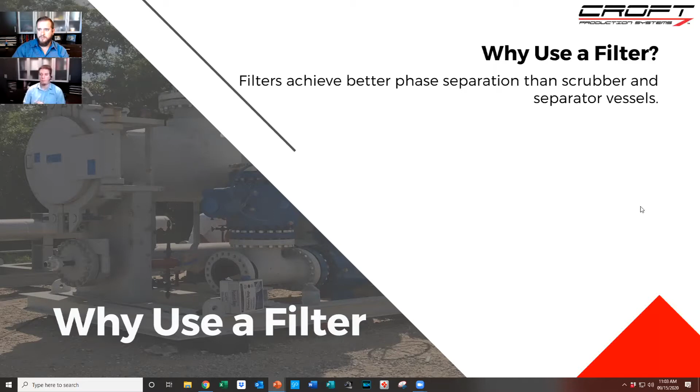And then for liquids, filters are super important to making sure that things stay maintenance and trouble free. So it's pretty well ridding yourself of these contaminants. We broke it up into three major areas: solids, semi-solids, and other contaminants. Can you elaborate on those three categories and why we break it up like that?

Yeah, so the particulates and liquids are what you want to get rid of first, and filters are really good ways of getting rid of the smaller particulates that may float through the gas and carry through. They may not stick or fall in the liquid, and they also get rid of some of the aerosols and mists that are going through there. But there are different kinds of contaminants that you may see. You have your solids, which are like your sand or your dry rust particles.

You also have your semi-solids, which are more like solids that are stuck in a liquid that make it a lot more viscous, a lot thicker. That's where you get sludges or slimes that may stick, like paraffins. Paraffin is a wax, and it's tricky because it can be a solid or a liquid depending on the temperatures you're in, so it can end up in different forms in different areas.

And then other contaminants can be like your foams, which are kind of like your weird phase items, and some of the weirder chemicals that may be out there that you want to remove before it gets into your processing equipment.

And the reason we want to take it out first is we don't want it to get into the downstream processing equipment where it'll get picked up and cause damage in that more expensive equipment. So I know you design glycol systems, amine plants.

So after this, you really want to kind of focus on the common issues just to hit home the solids, semi-solids, other contaminants.

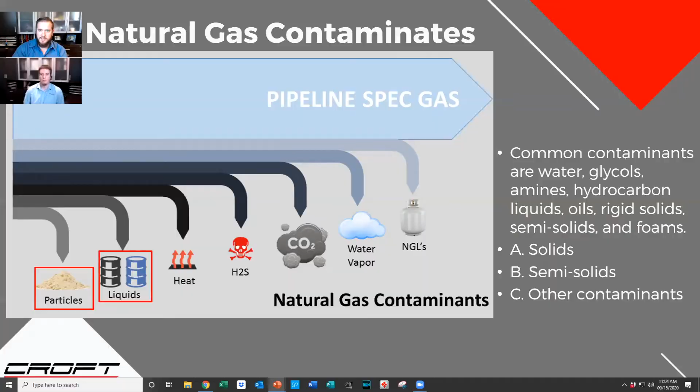So the first one you have for a common issue was hydrocarbons. Explain to us why this is a common issue. Yeah, so hydrocarbons, that's going to be your non-methane type stuff, your heavier hydrocarbons that may be coming through your gas stream and they end up in that processing equipment. Hydrocarbons are probably your most common issue, especially if you have a richer gas coming in through the system.

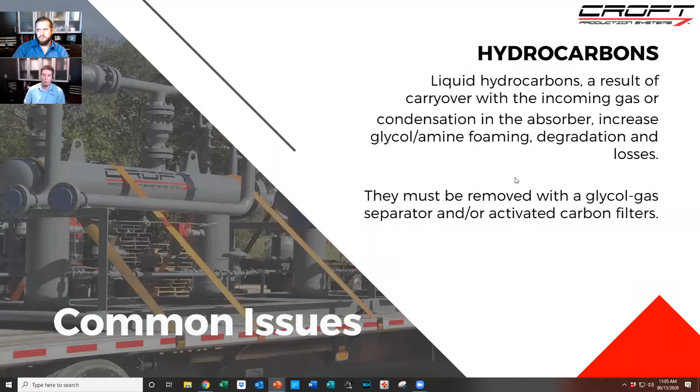Hydrocarbons, if you're not separating them out properly, either you have undersized or improperly sized separation equipment, it may make its way in there. With a glycol unit or an amine plant, you're basically liquid washing that gas stream, so it makes it very easy for it to pull things out of that gas stream, and it'll just take it to the regeneration side. Hydrocarbons, you can have a lot of them, especially if you have liquid carryover, a lot of condensate, that can come into your system. That can very quickly cause a big problem with your system. So making sure you're keeping an eye out for those is probably your biggest issue you're going to run into. So that's hydrocarbons. We got three more common issues.

The second one is sludge. Kind of go into what is a sludge, what makes a sludge, and then how would you remove it? So sludges can form pretty much anywhere in your production stream. If you have low spots with liquids, you may get some weird sludges that form due to production chemicals or particulates. But within a glycol or an amine unit, the sludges may form due to the combination of the heat and the temperatures and the different contaminants that may be ending up in that liquid.

So the sludges are pretty tricky. They can often be sticky. They can change their parameters depending on the temperatures. They may be soluble at a high temperature, so they don't show up in a reboiler, and then they carry through and cool off in a heat exchanger, and all of a sudden they stick to the walls of everything. So sludges are tricky and can form due to various reasons.

They can be a degradation product of the amine or glycol. If you heat it up too much, it may overcook it and then become a problem. But good filtration is really essential to making sure sludge doesn't form and doesn't end up in places where it's not supposed to.

Yeah, kind of what Terry was talking about on the glycol system, it does a lot on the absorber trays. It starts getting into the heated areas, and then you start losing that heat transfer, right? Yeah, it can really affect your heat exchangers if it's collecting in there, and if it's building up in a low spot and all of a sudden slugs into a pump, it can really damage a pump. And pump rebuilds are going to be one of your higher cost items for your standard maintenance on a properly working amine or glycol system.

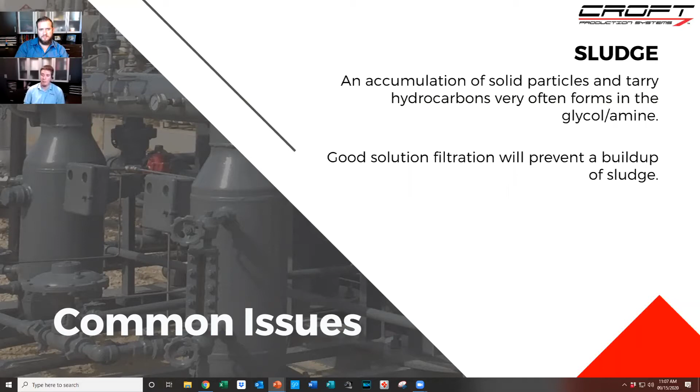Well, your third common issue, I know it's common, but this seems to happen a lot. It seems like you're getting a lot of troubleshooting tickets, mostly for foaming. Yeah, so foaming is usually caused in an amine or glycol system either mechanically or chemically. So mechanical foaming is going to be like particulates that get in there, and just the action of going through a bubble tray or some sort of tray tower, you're going to get that agitation that creates more foaming just from the mechanical side.

That usually breaks away pretty quick. It can be a problem if you have a lot of particulates in there. It can help carry some of those particulates into other areas you don't want them. But the big issue with foaming is the chemical foaming.

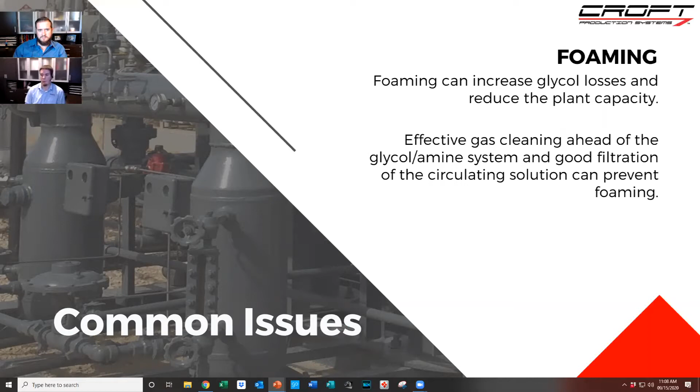So if you get a surfactant or some hydrocarbons into the system, they can create foaming of your glycol or amine, and that can very quickly cause a big upset, either carryover out of your tower or out of your still column. So minimizing foaming is very important. Typically in the more extreme cases, it's a chemical problem, like a surfactant carried through a compressor lube oil, or the actual lube oils themselves can cause problems, or some production chemical getting into the system causing that.

That's it. So from the common issues, we really wanted to focus on proper filter choice. The only way you can utilize that is by dissecting what is actually needed. The first one you broke up into two different designs: gas and liquid. The first one you're looking at is the gas application design. So walk us through - if you had someone coming to you, what would you look for?

The first thing you want to know is what the contaminant is you're trying to remove. Even if you have an existing filter vessel, there are different options for filter types that can go in there, and those can benefit you in different ways depending on what you're trying to remove. So if you have a dry gas application with an iron sulfide issue, like a black powder, there's a filter that works better for that than something that'll coalesce NGLs out of the system, or something for compressor lube oils. Knowing the contaminant you want to remove is number one, because that gives you the type of filter you're looking for.

Then you want to know your maximum flow and minimum operating pressure, because we're looking for superficial velocity through that system, so we know how to correctly size for that application. The temperature gives you some material choice restrictions at higher temperatures. And then the gas composition, to make sure the materials are compatible with what you're doing, and to get the specific gravity of the gas.

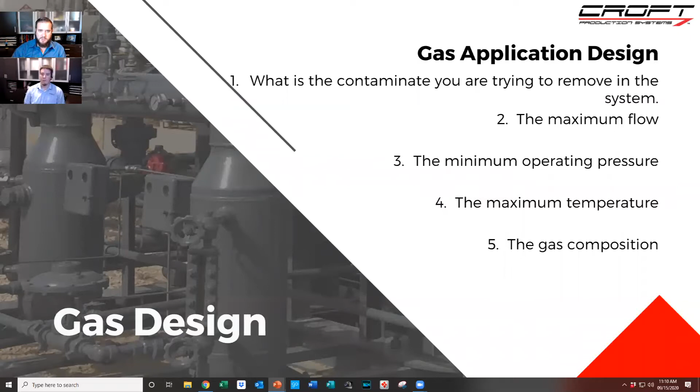So that's five things you would look for. The first time someone asks you for a filter, you would start breaking it down by this - this is what's required. From there, we can pretty much get everything we need for a quote.

The second set was liquid application design, because there are a few things that are different for a liquid application. So, number one, you still want to know the contaminant you're trying to remove. You're going to need the maximum flow of the liquid. Pressure doesn't really play an effect on it, but you do need the viscosity, because that affects the mesh of the filter and the density you can get away with. Composition tells you things like specific gravity and the different contaminants and chemical compatibilities, and then again the operating temperature is important.

So liquid design, you get a lot more options, a lot more different manufacturers for liquid design. If you're stuck with a certain type of vessel, those can be more difficult to retrofit if you're trying to change a filter. But for brand new design, this is kind of the base level - with this, you can pretty much size a filter, or know what the vendor will be asking you for.

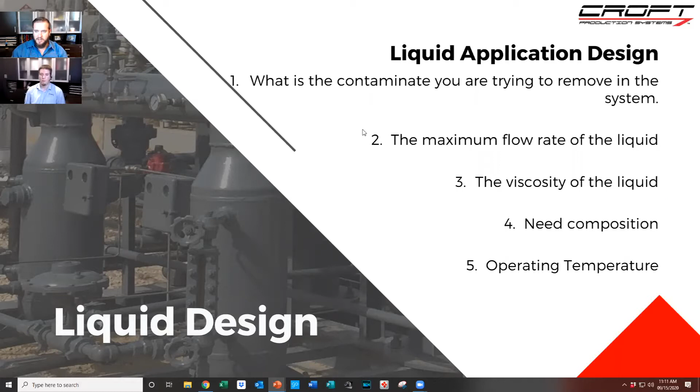From those two things, it can help you start dissecting and breaking it down to what you're looking for. But this is something you definitely want to share with everybody - materials of construction - because we've seen a lot of failures out in the field, and you always ask, what is the base product? You get the part number, then you start doing your back-end stuff. So materials of construction are broken into three areas. Tell us those three areas and why. These three things are going to dictate materials of construction.

First off, temperature - not all materials can handle different temperatures. Things like man-made chemicals, your plastic type filters, are obviously not going to be able to handle some higher temperatures. Things like cellulose, the way they bind those fibers together, they can't always handle higher temperatures either.

The length of service - that goes to how long you want that filter to last. Ideally, they're going to last as long as you can get them to, but there's a cost trade-off with that. A cheaper filter may not last as long, but if it's a quarter of the price of the more expensive one, then maybe it's worth it.

Depending on what's acceptable for length of service can kind of dictate the material choice. Chemical compatibility is going to be your big one, because the last thing you want is the filter to dissolve in what you're trying to use. Not all filters can be swapped between like a glycol or an amine, so knowing what is compatible is very important.

We got filters out in 14 states. As a CEO, when I'm looking at how many times our service guys are having to hit everything, the length of service was a big thing for us - going from every 4 days to 21 days before a filter change out. I know we had to keep playing with it for each one, and it takes a lot of effort, but once you get in the rhythm of what works and what doesn't, it saved us a lot of operational cost on the back end.

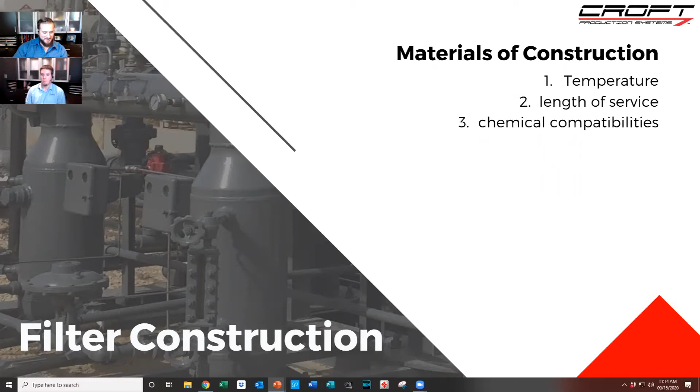So the next set, you're really wanting to focus in - we're not going to touch all the media materials, but we wanted to hit the big ones. So the first one you have is cotton, so kind of run through what that is.

So cotton is a very popular filter choice. There's cellulose as well - we don't use it. Cellulose filters are the very cheap option, it's paper, right? Yeah, they use paper-type material. They can be used for a lot of different stuff. A lot of people spec them in, but...

Cotton is really kind of like a really good base level choice for amines and glycol units. The cotton does need to be a virgin cotton, not recycled cotton, because you don't know what you're getting with that. And then you definitely can't have any of the cottonseed oil on the cotton, or else that oil can create foaming problems or other issues. But cotton is a pretty good one.

Your most common things you're going to see are like your string wound filters - those are usually cotton string. But they make different designs, like pleated cotton designs. This particular one is a sock-covered pleated design, so it has good dirt holding capacity compared to a string wound. But cotton is really good because it does have a higher temperature that it can be used for.

And there's no chemical compatibility issues with amines or glycols. But you do have to make sure you check to make sure that it is made for that service - it's not a cheaper grade or something that hasn't had all the oils removed, or might be recycled with, you know, old T-shirts in it or something.

I guess for our procurement, do you call the manufacturer and say I need virgin oil cotton filter? I mean, is there a way to understand that there's no cottonseed oil in it?

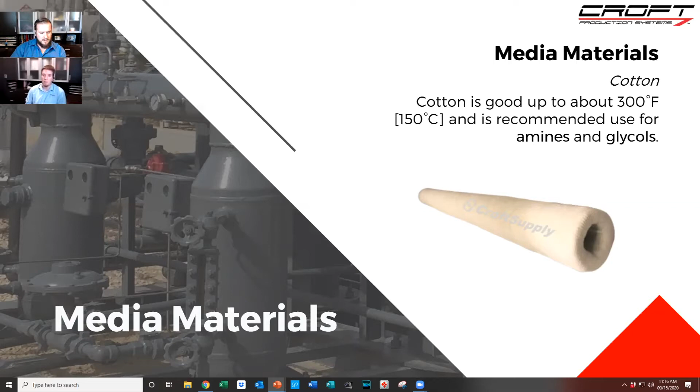Their second media type was polypropylene. Polypropylene is a plastic-based material and is the go-to choice for water filtration. So if you're filtering produced water to clean it up for recycle use, or to clean it up enough for a frac or drilling mud, polypropylene is used a lot for that water cleanup.

Polypropylene is also a good choice for amine service, if it's made properly for an amine filter. The temperature ratings aren't quite as good, especially with the temperatures you might see in amine service, so it may not be the best option, but it's a really good filtering option if it's within that temperature window. You can see the effects of good filtration in how well it removes solids.

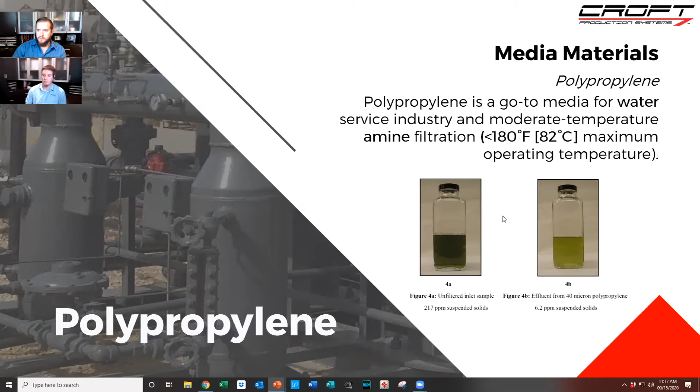The third media material is fiberglass. Fiberglass is made differently from polypropylene, and it's really commonly used for your lower grade coalescing filters—the standard coalescing filters used throughout the industry, or your filter separator type filters. A lot of those are fiberglass.

Fiberglass is great for hydrocarbons because there's no reaction to hydrocarbons or oils, but it can be an issue with amines or other high pH fluids. So fiberglass filters aren't a great choice if you're trying to recover liquids off the contact tower of an amine plant, say to reduce amine losses when your scrubber isn't quite up to it—you drop a coalescing filter after the tower. It's a good option to try to recover that, but you have to be careful with your filter choice, because fiberglass may not be the best choice to coalesce and recover those liquids.

But fiberglass media is a really good choice for coalescing filters overall—it's cost-effective, especially if you don't need super high efficiency, and it's usually what you see used for coalescing filters.

Fiberglass also handles high temperatures, like 300 to 400 degrees, so on the high temperature range it's probably the best option if you have temperature issues. That makes it really good for compressor discharge filters—coalescing after compressor discharge. Maybe not so much if you're trying to remove really hard-to-remove compressor lube oils, but for coalescing after a compressor with rich gas, fiberglass is a good choice.

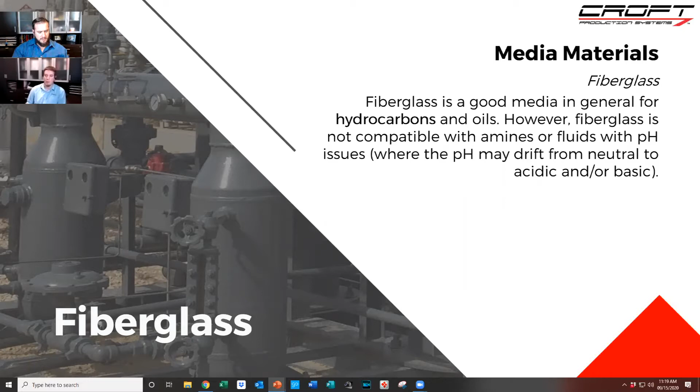Our last media type was polyester. It's a good fit for glycol systems, and it's got a higher temperature rating typically than polypropylene.

There are benefits to these plastic type materials because they're physically stronger than something like cotton—the polyester fibers hold together well. It can handle a little higher differential across it, which means better dirt loading, so you can get away with thinner, physically less material in the filter and still get the same micron rating and effectiveness.

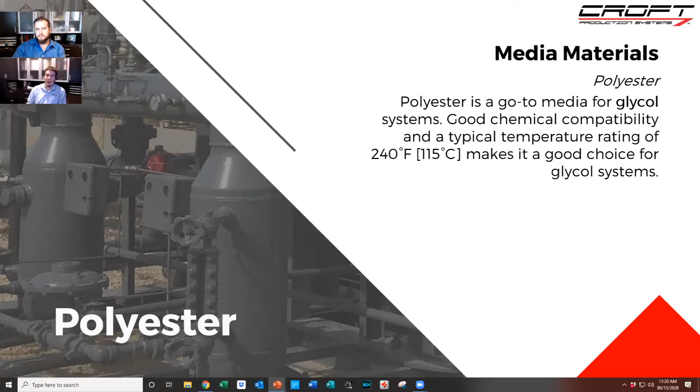Built right, these filters can be a really good option because of good chemical compatibility, and when built into a good shaped filter, they can give you a longer service life than a typical string wound filter. A string wound filter can get surface loaded with junk, whereas a good pleated filter can handle a lot more capacity in the same shape and size.

Well, I know this last one is Gasket Choice. The Gasket Choice is mostly for the filter housings because we're swapping the filters in and out, making sure you have a proper seal. And we wanted to put this in there because we've learned our lessons. We found the reasons why not to do certain things because things disintegrated, chemical compatibility. But explain, if you can, go into these three major choices and the differences of them.

So the gaskets, when we're talking about these, they show up in two places: physically on the filter, and sealing the filter housing. It's kind of the same issue, but you want to make sure those gasket materials are the proper choice. So Buna is going to be a real common filter gasket material, either Buna O-rings for the filter vessel heads, or Buna gaskets on the ends of the filters to seal them within the vessel.

But it is not a good choice for amine, so it does have certain chemical compatibility issues. For glycol and hydrocarbons, it's fine and it's going to work great for that. You may see some swelling, like on some of our vessels that have those closures. Sometimes we have to leave them out in the sun to get the O-ring to shrink, because it'll pop out of its groove, so we got to cook some of the hydrocarbons out of there because they will absorb them sometimes.

Viton is satisfactory for amine, but it still will degrade over time. And it can get expensive trying to make bigger custom filters or gaskets. But it needs to be minimally Viton if you do have an amine service or amine plant.

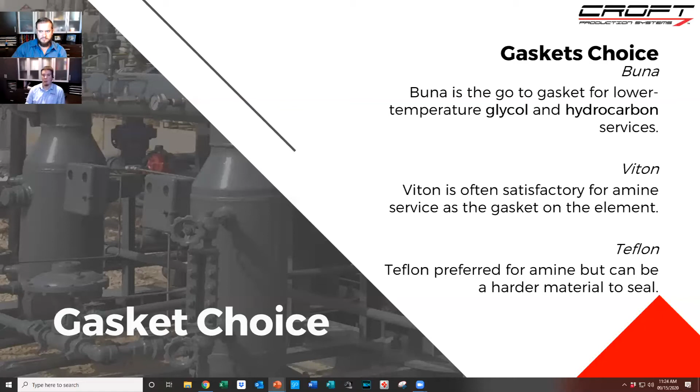So getting from that, we went through the media materials. Now we're going to go specifically into glycol and amine filtration. We've got coalescing after this, but we wanted to specifically go into this. So this is a typical amine PFD. We've got about 5 major areas that filters are recommended to have, so you can walk us through why these filters. I know we're going to touch on specifics after this, so let's generally go through this.

For the first thing, before the amine and glycol unit, both, I'd say a coalescing filter is a requirement. You can operate without it, but a coalescing filter will save you so much headache from problems. A good coalescing filter ahead of that contact tower removes the contaminants in there. And the farther away you are from the wellhead, the more chance there is of other things getting in there—compressor lube oils if you're after major compression, surfactants that may make their way through separators.

Other production chemicals, methanol, all these things can cause problems, so a good coalescing filter ahead of the contactor will work. The coalescing filter will also remove particulates, keeping that out of your regeneration system, which will also extend the life of the filters on your regeneration system. If your contact tower isn't removing the particulates, you're just going to catch them in your little filters, and you'll have to change those more often.

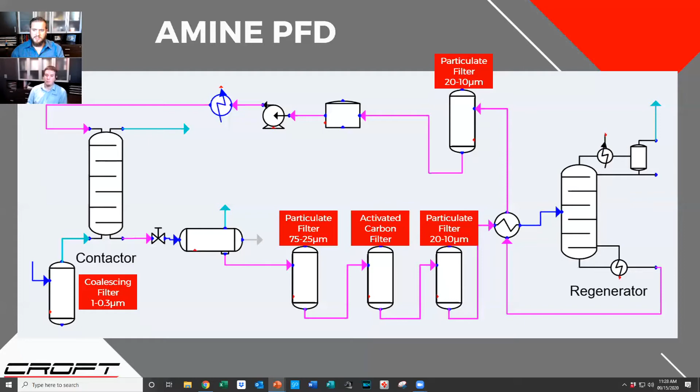That's the amine, and then the glycol PFD—a lot of it's pretty similar. I mean, both systems are pretty similar, but let's talk about what the differences are.

The main difference with the glycol unit is a lot of them are going to be smaller systems with a Kimray pump on them. I think it's very important—Kimray recommends a filter ahead of their pump, you just don't see it a lot, especially on smaller glycol systems. You don't see an inlet filter on the high pressure suction of that Kimray pump, but I think it's a very important thing.

It should be at least a 75 micron filter—Kimray says it needs to be at least 100 micron or better, but really if you get to 75, you're helping out a lot. And then carbon filtration is also very important for glycol. Again, you really don't see it on the smaller units, but it's very important to keep the smaller hydrocarbons and some of the chemical issues out of the system.

It's also good to have particulate filtration after a carbon filter, because the carbon filter may have what they call carbon fines, very fine particulates that break off. You don't want that ending up piling up in a reboiler or getting stuck in a heat exchanger. So it is good to have a particulate filter after that.

It's also good to have a staged filter, with a higher micron and a lower micron. The higher micron catches the bigger stuff and the smaller one catches the smaller stuff. If you had the low micron at the beginning, you may have to change that filter more often while never changing the second one. Staging it out can help extend the life of both filters, so you get 2 months where you change both instead of changing the lead one every 2 weeks, because it's getting so loaded up from the smaller micron.

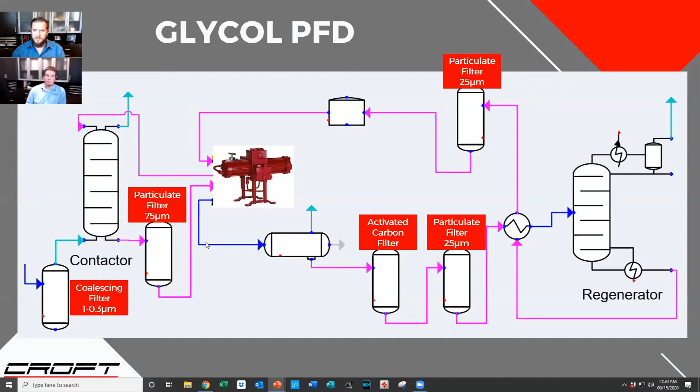Well, it's kind of going into—so in the beginning we were talking about chemical compatibility, temperatures, first identifying what you have. So this first one is analysis and control of the glycol, identifying what we have in the system so we can match the correct filter to it.

So explain to us, you broke it up into 2 areas, field tests and lab tests. Yeah, so analyzing the glycol or amine can really give you a good idea of where your potential failures are in your filtration. If you're having issues or don't like what you're seeing in the plant, some field tests can really help out.

A quick foam test—shaking up a sample of the glycol to see if it's foaming—will tell you if your carbon filter is doing what it's supposed to, or if maybe you need to add a defoamer. Testing the pH is also very important, like we saw in the dehydration module. That's something Terry is very big on. It's critical if you're trying to reduce corrosion in your system, your glycol unit. So measuring pH every once in a while is a great idea.

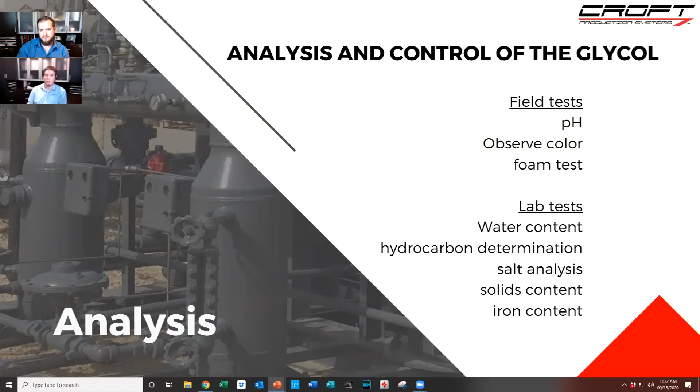And then you can always send it off to a lab to get all this tested. The lab will tell you a lot more information—solids, iron content, salt that may be coming in from the well, hydrocarbon in there. So it's a really good way to see exactly what the contaminants are if you can send it off. It's also good to send off lab samples just to have a baseline. If you do it once or twice a year, it's nice to have a baseline to see if there are any trends that may be a cause for concern.

Now that's for glycol, so again it's identifying the issues within the system. On an amine, there are some slight differences. You still broke it up into field tests and lab tests, but tell us what the differences are for amine. Yeah, so for amine, you're going to do the same thing.

For an amine plant, it is a lot more important that you maintain the quality of the liquid going through there. You really want to make sure that's more important than a glycol system. Glycol systems are a little more forgiving, but for an amine, you really want the cleanest amine you can get. It just really will help you operationally. Something we've seen in our plants that we operate is it can be fine up to a point, then all of a sudden you have a problem, and it takes a lot of effort to get it back to that point.

So though it took 3 weeks to finally get to a point where you see the color getting darker and darker, and everything's still working okay, you just keep accepting it. When it turns into now you have to fix it, it is a big hassle. So maintaining it and monitoring how things are looking is very important.

For an amine plant, you're going to do a titration to see what your percent of amine to water is. Again, pH, observe the color, observing the foam. A great foam test for the charcoal filters, test it before and after to see if it's actually doing anything. And then I think a lab test is something that should always be done for amine. You should maybe quarterly be sending away for lab samples just to make sure.

With an amine plant, because of the corrosive nature of what you're removing from there, you could be slowly dissolving your plant. So it's good to really have an idea of what your baselines are. Are things getting worse? Are they getting better? And knowing how much, like when you get a big upset, you know that you put in a bunch more water or amine to make up for lost water. Knowing what that is and keeping good logs of all that is very important to make sure it's working well.

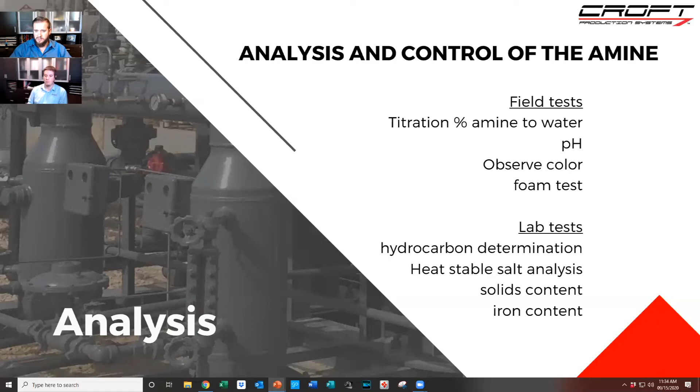All right, so that's kind of identifying where we're at, so that way we can match up to the chemical compatibility, temperatures, everything of our system. So now we're going into some quick recommendations. These are our quick lessons we learned over the years.

So the first one was filter recommendation for a glycol system. Let's explain this quickly and then go through why.

Yeah, so the standard micron for glycol filtration is going to be like a 75, maybe 50 micron. That's usually what's going to come with a standard filter housing, and you can live with that, you can get through most days with that. But if you can afford the 25 micron, keeping it at 25 micron, you're going to extend the life of that plant. You're going to extend the life of the pumps, the valves, the controllers on that unit, and you're going to keep your glycol a lot cleaner. Clean glycol is less likely to foam, it's less likely to need to be replaced. If it gets to such a bad condition that you have to swap the whole thing, that's very expensive, and who knows how much junk's been building up inside that system.

So 25 micron, it should be what they call water white, where the glycol has a little yellowish tint to it, but it needs to look clear. If it's foggy or anything like that, then you need upping the quality of the filtration. So string wound filters are going to be kind of like your standard base level filtration, but going to a nicer cotton filter or a better polyester filter, a good pleated, well-made polyester filter, can give you really good dirt holding capacity and a true 20 to 25 micron absolute rating, instead of just probably a 25 micron with a string wound, but more like a 50 micron.

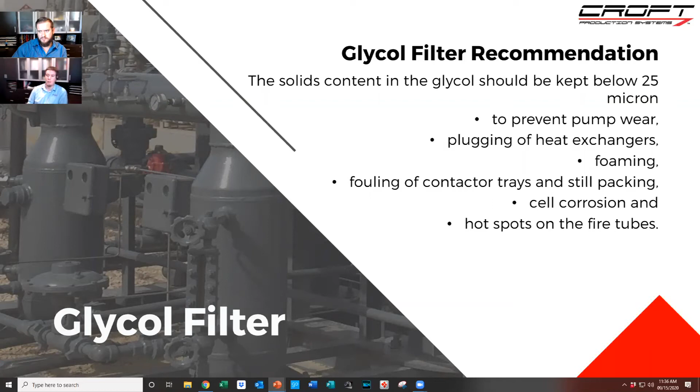All right, so that's kind of going down to a 25. So particulate filters for glycol systems is our second recommendation. So explain to us what you're looking for on that one.

Yeah, so that I kind of covered in the other slide, but 25 microns is kind of where you want to be with that. It's very important to make sure that you do have a good, absolute 20 to 25 micron rating in there, because you don't want it building up on areas inside the system, because eventually it gets to the point where you have to, if you have to take a still column off and change all the packing, it's a lot of work.

It's a lot of cleaning, it's a lot of dirty work, and so it's going to shut things down for a good amount of time.

The big one on that was people utilize, say, sock filters. I need a sock filter. Now, I know people use different terminology. A sock filter, I always picture just a true sock filter, but what are they actually meaning? Because we like to say particulate filter. So explain that difference. Yeah, so sock filter is a generic term.

Even those canister filters that are like the hard brown material, people still call those sock filters too. A true sock filter is literally a tube sock looking material stretched over a frame. It's an old style design. They still have their use, but I think the name just kind of stuck. A lot of times they're covered in a sock. Even the nicer ones are covered in what looks like a sock. But even though it's like a pleated filter or a depth filter, it's just covered in a sock to help with the drainage of the liquid. But really, you want a good particulate filter meant for this service.

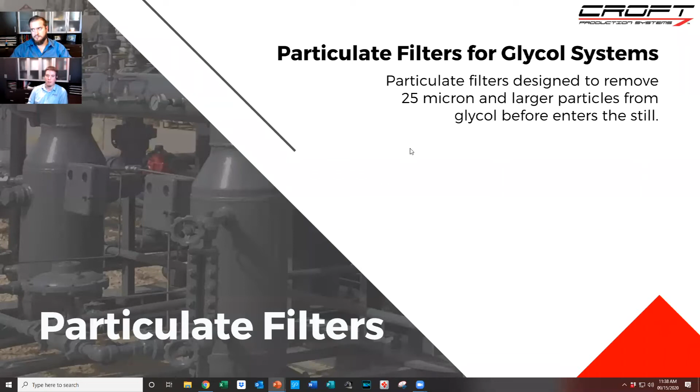All right, so your other recommendation was activated carbon filters for glycol systems. I know that was a big push, you kind of got excited about this one. So tell us, why were you excited about it?

So carbon filters I think are very important. Typically they're considered optional for like 500 MBTU regens and smaller. Really, a carbon filter should not really be optional in a glycol system. Yes, you can get away without it, but the added cost of that is usually equal to or less than the cost of swapping out all your glycol, even on a small unit, once. And so if you don't have a charcoal filter, you're going to have to swap that glycol more often. It may be once a year, maybe twice, or every 2 or 3 years, but eventually you're going to have to do it. Whereas if you just maintain the charcoal filter, you're not going to have to deal with that.

The other big problem we see is that for the carbon filters, everyone likes to use those carbon canisters. They look like a big old paint can. They're either a 7-inch or 11-inch diameter, and they're about 2 foot long. They like them because they're easy to change. The problem with those is that the bigger 11-inch diameter one is only good for 1.3 GPM.

That's about 80 GPH. So if you think of a Kimray pump, like a 90 GPH pump is the smaller one for like a 200 regen, but you see 750 glycol units, 750 MBTU regens that do 450 GPH with that single canister carbon filter on them, which means that single canister carbon filter can only really be used in slipstream properly. You shouldn't do full stream with it because it's only good for 1.3 GPM, but that unit's running 7.5 GPM.

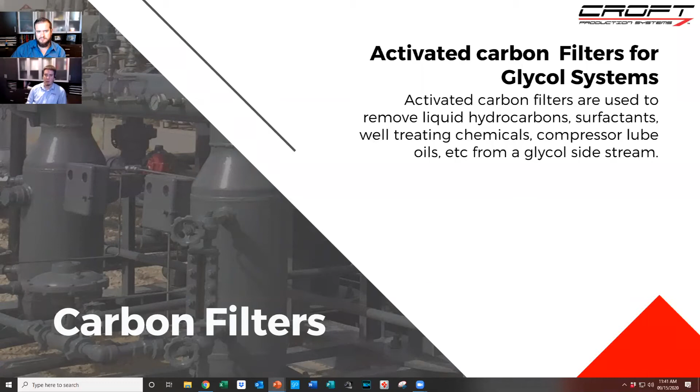The next one was bypass and safety. We had this issue when we first started off designing out there. We put out the filters, and if you don't have a bypass to operationally bypass it so you can depressurize it and change out the filter, your service techs don't do it. They kind of pencil whip everything, which we found out when we started having a domino effect of troubleshooting calls afterwards. So now all of our systems have a built-in bypass ready to go, because if it's not operationally going to function for them, no one's going to do it. It's too much of a headache to shut down a pump and then have to re-kick everything back on.

This is something we see a lot on smaller glycol units. For some reason, manufacturers don't seem to like to put a bypass around the filter. A standard small glycol regen will only have a lean filter on it. I don't know why that became standard, it's a terrible idea, but for some reason that seems to be the standard. The only filter they want to put on is that one, and they don't put a bypass on it, which means you have to turn your pumps off, block it in, drain the liquid off that vessel, and the unit's just not pumping. If you don't want to turn the reboiler off either, then temperatures shut down and everything. But then you have to reestablish circulation.

It can be a problem, especially if the operator is not that great at reestablishing circulation, making sure the pump's set rate, and knowing what that pump was set to, so you've optimized your glycol circulation. If they don't know how to do all that - a bypass, you could send anybody to change a filter if it's got a bypass. That's a lot easier to learn than learning how to properly start and stop circulation on a glycol unit, and then optimize that circulation rate for how much water you're removing.

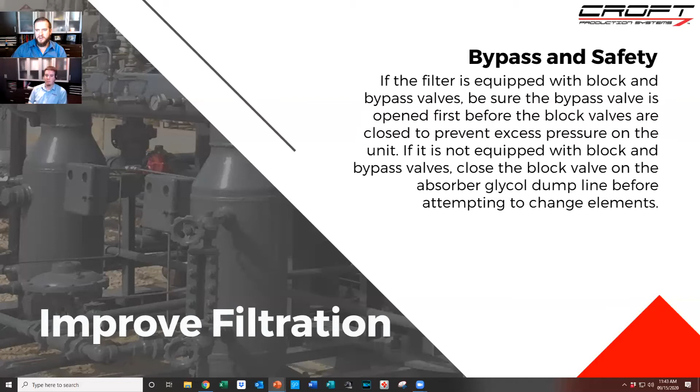The other one was filters for rich and lean side. I know you're a big proponent - like you were saying earlier, you usually get filters only on the lean side for some reason. So you and Terry are real big on filters on the rich and lean side. So kind of go into that, why.

Yeah, so the filters on the rich side are filtering the stuff that's coming in that the glycol or amine has been able to wash out of the gas stream - contaminants coming in from the gas stream system. Your filter on the lean side is going to be stuff that may have been created within the reboiler. So they both serve different purposes that are important, and it's really good to have both of them. The lean side is also protecting your pumps, but it's also protecting your heat exchangers, fouling your contact tower, and any other controllers that you may have through there.

So it is important to have it on both sides. And like I was saying when we showed the PFD for the glycol unit, having a high pressure canister filter before that Kimray pump helps protect that pump. Because if you get sand into that thing, you're going to scratch those cylinders within that pump.

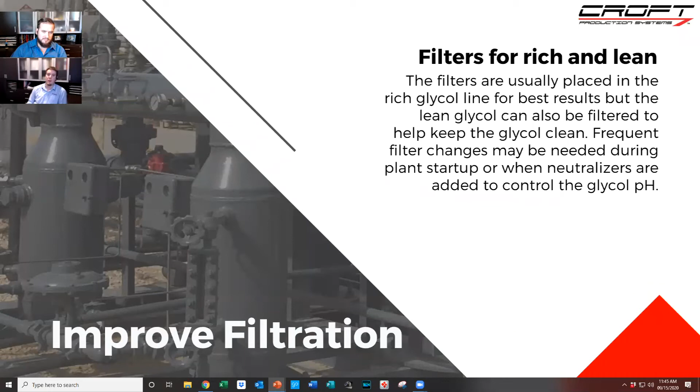That pump may start bypassing if you cut those seals, and then the pump isn't going to hold its speed, or you're going to have to change it or rebuild it more often, which can get expensive compared to the cost of a filter. We had those little ones that cost like $15. That saves you on a bigger pump. Here in the States, it's going to cost you $3,000 to exchange a 450 pump. Take the broken one, give it to them, get a rebuilt one, compared to a $15 filter that would have saved you that. That's a big cost savings.

Well, one of your last ones was improved filtration, observe the filter use. Now, you said that earlier, kind of like a step down on the filter side. So where we tell our service guys, pull it out, cut it in half, look at it, and then explain to us why cutting it in half. What are you looking for?

So if that's something that you're seeing, strictly looking at differential isn't always the best option for changing your filters, especially with coalescing filters. It's definitely not, because if you collapse a filter, then there is no differential and you think your filter's clean, but it's just been destroyed. So it is good to actually look at the filters, see how they are collecting, to make sure that you do have the right filter choice in there for what you're using.

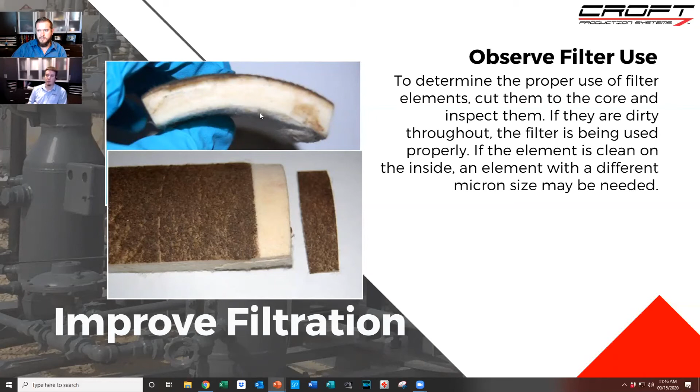So on your last one was a foam test for activated carbon. I know you've been touching on it several times and you're very excited about activated carbon. So explain to us that foam test. Yeah, so the foam test is super easy. You just take two samples, before and after the carbon filter, you shake them up, and you examine the foam head that sits on top of those samples.

So it's obviously going to foam if you shake it up. If it all breaks away pretty quick, then you're fine. If you have a steady foam on top of your inlet sample, but your outlet sample has no foam, then your carbon filter is working great. But if you're doing this test often enough, you can actually see when the carbon filter is no longer doing what it's supposed to, because the foam on the outlet will get more and more. So making sure that is working, it's a really quick way to check to see if that carbon filter is still working for you.

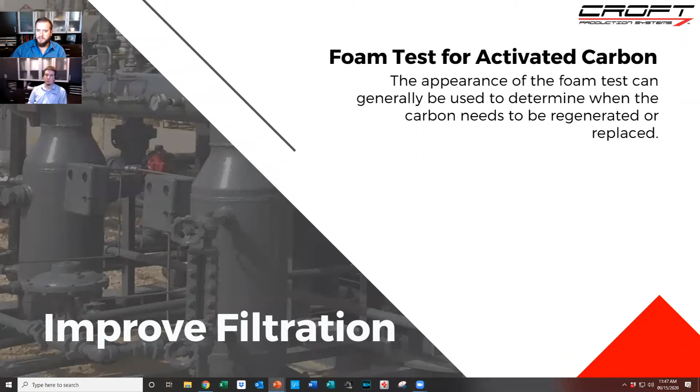All right, so that's amine and glycol. So now we're going into coalescing filters, focused on that. So again, foundation steps, go through us on what is a coalescing gas separator, and what is the goal of it?

So coalescing filters are for use after your separator. Your separator is going to get you down to about 10 micron. A coalescing filter is what can actually get you down to 0.1 micron with a good enough coalescing filter. They're gas filtration for removing the stuff that the separators aren't quite getting.

Now, that was actually back to one of the questions. Someone asked, in gas processing, we use wire mesh for filtration. I think he's talking about the mist pad on a mechanical separator. So you're saying if that's the case, you would put a coalescing filter downstream of a mechanical filter or wire mesh? Is that what you mean? Yeah, so I mean, it could be like a strainer.

Strainers, you can get strainers down to I think 50 micron. With a strainer, they just really don't have a lot of dirt holding capacity. So if they get hit with junk, they're going to block up pretty quick, because it's just like that single layer mesh.

Sometimes you have what field guys call a witch's hat. It's just for catching cats and dogs that may be coming through the pipe. It's usually used before a compressor, so the big rocks that may have made their way into the pipe don't end up slamming into a compressor valve.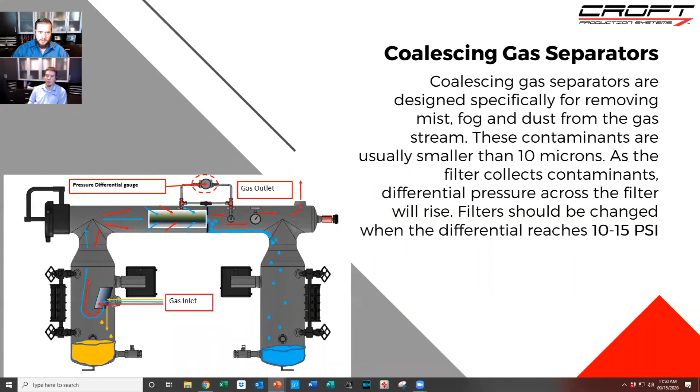That's what you want to split up again: what is a filter separator versus a coalescer? Because when the client's talking with us, they kind of use it synonymously, they just throw it out there, but it is two different things. So explain what the differences are.

Filter separators are usually filters that'll take you down to around 1 micron, but they're really meant for particulate removal and maybe a little coalescing. Really, they're meant for particulate removal, versus a coalescer, which is specifically designed to coalesce the liquids out of the gas - that's your aerosols, your mist, your fog.

When you get condensate creating, it's going to condense on the sides of the pipe, but you can also get a fog of that condensate condensing mid gas stream - just a fog floating through the gas stream. To get that out is tricky because it's light, it can be tricky to remove. Removing it with a coalescing filter is the best way to get that out. But it is two different types of filters, and it can also change the configuration of the vessels.

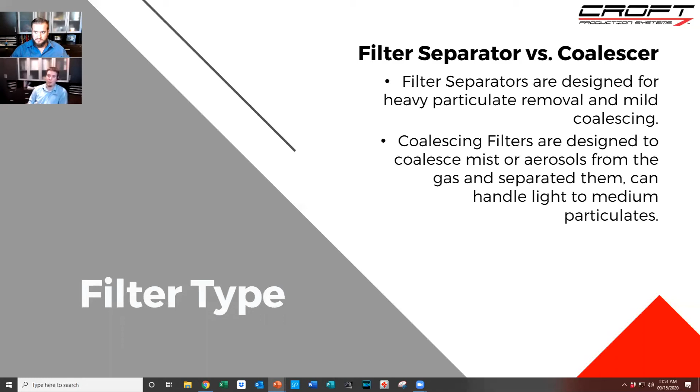Now, vertical and horizontal - I know on a lot of our fleet we use horizontal filters, but explain the differences and advantages. Horizontal is usually going to be your filter separator, that's the common design. Some manufacturers, like PECO, make a horizontal that is a coalescing filter, but typically your horizontals are going to be a filter separator, usually with outside to inside flow.

That means when you open the big hatch and you're looking at your filters, that's your dirty side - that's your gas inlet side of things. So you may actually get dirt you can pull out when it falls off the filter. But that's usually filter separators.

Vertical vessels are more likely going to be a coalescing filter. Your best high efficiency coalescing filters are almost always vertical configurations, with an inside to outside flow on that filter - the gas comes in through the middle, and when you open the hatch, you're looking at the outlet side of the filters. Those are best for coalescing for configuration reasons. Usually the best coalescing filters are vertical configurations.

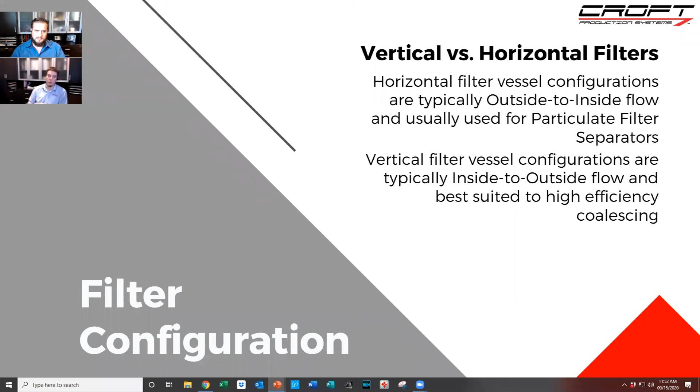Pleated style filters - now going more specific into the media materials we utilize. The pleated style, like the JPMG or PSFG style filters from PECO and Jonell, can get you down to 0.5 micron, but these are really good for high particulate holding. They hold a lot of dirt because of that shape - the dirt can fall in the grooves, but you still have open area for the gas to flow through.

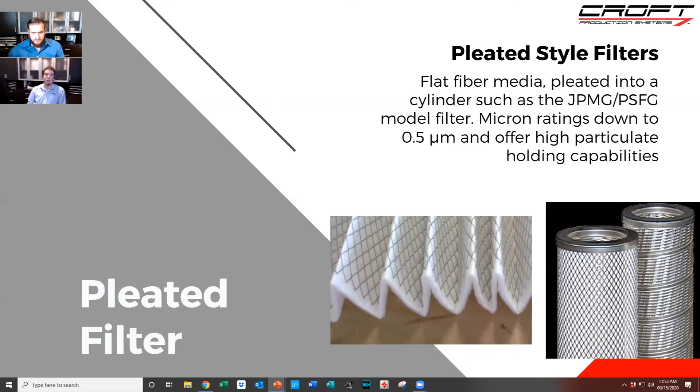There's flat material that's been folded into pleats and then wrapped into a cylinder. They're really good for particulate holding. They can do some coalescing, but if you have a lot of particulates you're trying to remove, they're a really good option for that.

Your second one was depth style filters, so let's go into that. We use the picture on the left-hand side a lot. The JFG or FG model filters, if it's got a bunch of numbers after it, those are the workhorse of the industry for coalescing filters and filter separators. A lot of people use them. Jonell and PECO sell a ton of those things.

They can get you down to 1 micron. They can do some coalescing, and they can also catch particulates on the outside. But these are meant more for a good mix of both coalescing and particulate holding. It's just a thick pad of fiber material that the gas has to go through, so the gas has to wiggle through all those different fibers, and that torturous path helps knock stuff out of the gas stream and coalesce particulates.

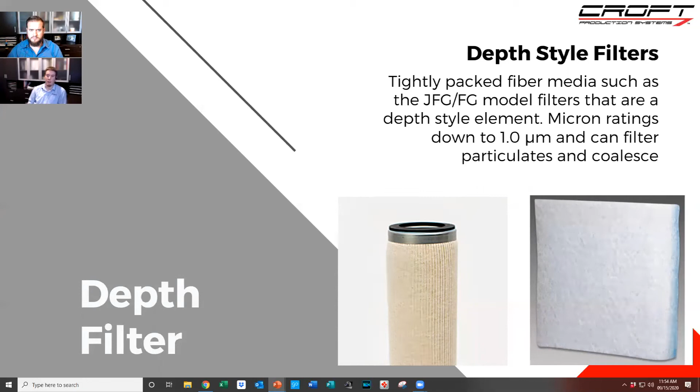So what makes advanced depth style filters advanced? For the highest end of the coalescing filters, the fiber is actually a different shape, it's not round. And then it comes down to quality control too, like the thickness of the material and the effectiveness of it. These coalescing filters are the ones that get you down to 0.1 micron.

They're usually like the one pictured there, that's a reverse flow, meaning an inside-out flow, vertical configuration filter. So if you put it in the right vessel with that filter, you can get down to 0.1 micron on your outlet.

These are really good for difficult to remove liquids, like high detergent compressor oil, low surface tension liquids, stuff that's going to shear really easily, that doesn't stick to things very well or fall off of something. For those, you need this more advanced filter to be able to remove them.

High detergent compressor lube oil can cause all sorts of problems. We see it all the time with our dehys - they cause foaming inside contact towers. You need a nicer filter to be able to remove those, and these advanced filters are really the only way to do that effectively.

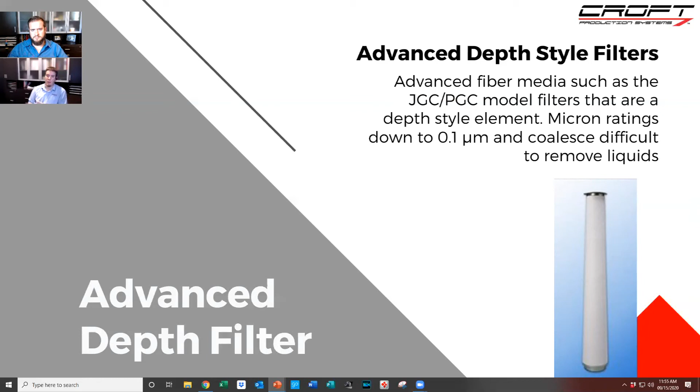Your quick recommendation for coalescing separators - explain why. On the differential gauge, the cheaper differential gauges do not have the little follower needle. I think it's always great to have that follower needle, especially on coalescing filters, because whatever the highest reading it sees, it will stay there, even if the needle drops back down.

If you look at it and see it went up to 20 but it's not there anymore, there's a good chance that filter's collapsed. So it's a little more expensive to pay for, but it's a really good way, especially with changing pressures or volumes, to see if it did get to the point where it needs to change.

A lot of the wells we're seeing, especially in the shale fields, are starting to decline, and equipment's maybe a little oversized than it was. A lot of wells are getting put on intermittent flow or plunger lift operations, which gives you erratic flow. If you're looking at it flowing 100 MCF but it spikes at 1 million and you were never there for it, you don't know if that filter actually needs to be changed. That's a really cheap little option that gives you more insight into operations.

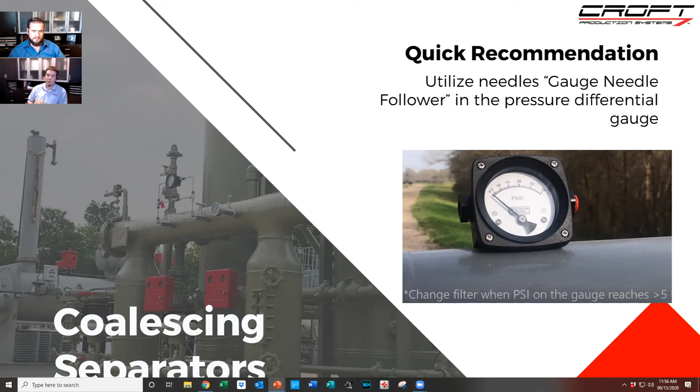All right, so we're going to wrap this up. We've got 5 case studies that reaffirm our lessons learned on this. We're going to go through these pretty quickly. Case study number one, amine filter - what happened?

The company guy had some defoamer left over, and instead of our service guy using what we normally get, because he didn't have it on his truck, he grabbed what the field guy gave him because it was free, and we ended up with about a week's worth of headache trying to get this out of our system.

This goes back to chemical compatibility, making sure that things are compatible with what they're supposed to be used with. This defoamer obviously wasn't compatible with amine, so it gummed up the filters pretty good. This should be a case study of why you change filters and have good filters.

It's good to have differential gauges to tell you when this happens, because these run the smaller Nowata cartridges, and to add a differential to that you have to pipe it in, so it takes a little more effort to put a differential gauge on those kind of canisters, but it's worth it because you see things like this immediately.

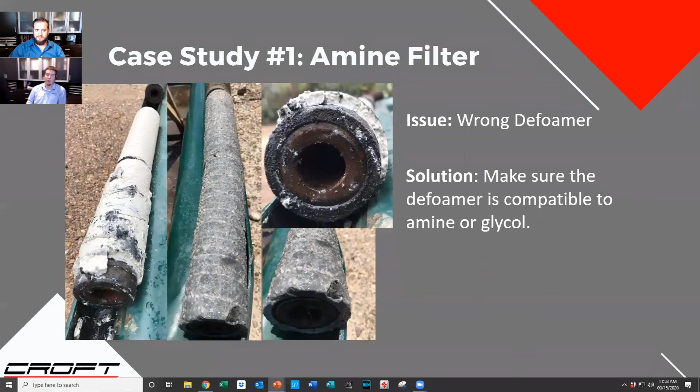You're not wondering why your pump's not stroking, thinking the pump's broken, when really your filters are so clogged you can't even run your pump.

Once you actually started washing it off, you could see the brownness of the mud and all the rocks and everything in it. This is because it was collapsed, it wasn't showing a differential, because it broke off the back end of it. This one is stretched because they've tried to pull it out and it's so jammed on the holder.

But this is a really good reason why you should change your filters. Also, it's good to have a separator ahead of things. This one didn't, and so the slug section on this wasn't able to handle it. It is good to have an initial slug separator ahead of a filter. It'll give you more life out of your filters and make them last longer.

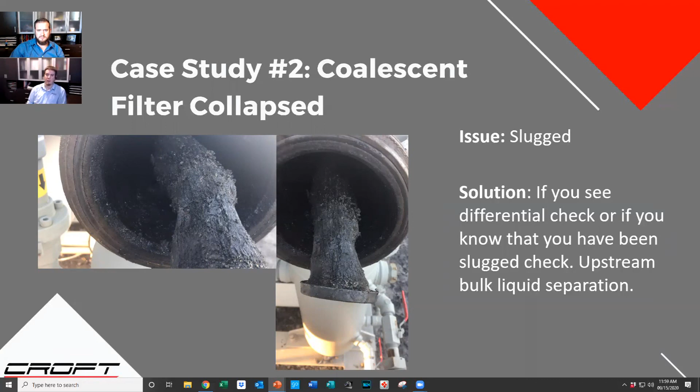Case study number 3, wrong filter choice. We spent half the time talking about filter choices and identifying what you have in the system. So now, walk us through the issue and the solution on this one.

This was a string wound filter that was not the right material. You can get string wounds in other materials - not just cotton, you can get them in stronger materials. And this one was not the right one. You can see all the strings have broken apart. It looks like they started to fall over within the actual vessel and created quite the mess to have to clean up.

So this really shows why the material matters - just because you use it in glycol does not mean it can work in amine service. Even if it's the exact same size filter, some of them you can swap, but not all of them. You can't just swap them back and forth. This is why it's really good to check the chemical compatibility with your filters.

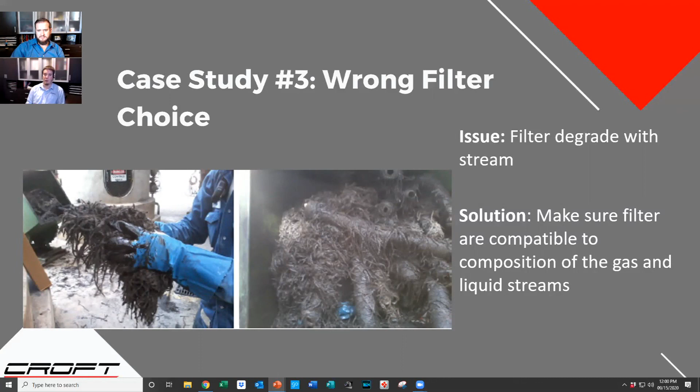Case study number 4, deficient amine filter design. Walk through this one. These look like good filters, higher quality polypropylene filters, I'm guessing from the white material, and they have a nice big vessel, so this would have been a fairly large amine plant. But what they didn't account for was the temperature these were going to be exposed to.

As you can see, the temperature of the hot liquid coming in has melted these filters to where they're probably falling off their seals on the bottom, and they're probably melting together to where they're not actually filtering like they're supposed to. Somebody didn't check what the operating temperatures were going to be, probably in a worst case scenario, and what happens when that operating temperature gets beyond what it's supposed to.

Amine plants usually operate a little hotter than glycol units. You have a heat of reaction in the contact tower that brings a lot of heat back into the system from the contact tower.

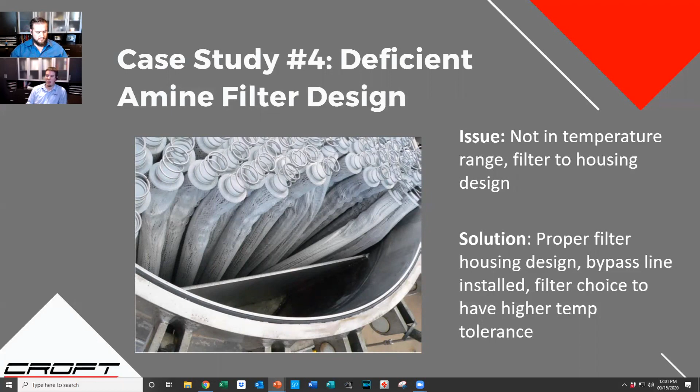So on a rich filter, you can easily melt things, especially if you're hitting like 140, 150 degree temperatures, getting close to the max operating temperature for those materials. On the lean side, you have an exchanger issue, or somebody bypasses an exchanger, and that can melt your filters. This was from not checking temperatures, and not knowing what those temperatures could be for this plant.